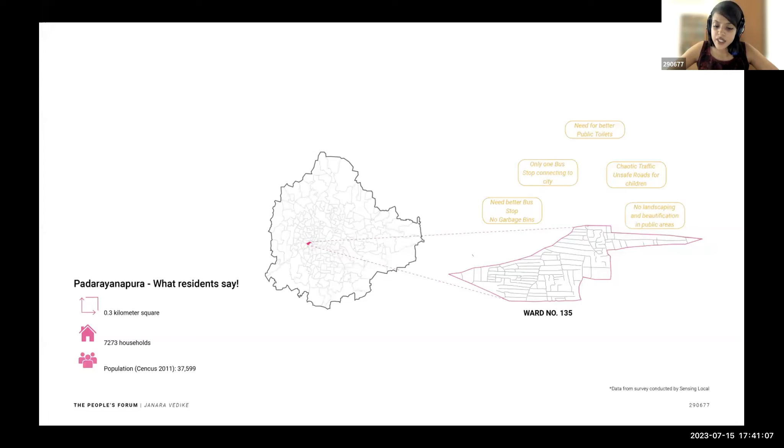Janara Vedike, or the People's Forum, is an attempt to build a ward-level identity through urban transformation. Padarayanapura is a ward of nearly 38,000 people, and over the years it has remained largely underserviced with respect to built environment and public infrastructure. For example, there's only one major bus shelter in the entire ward.

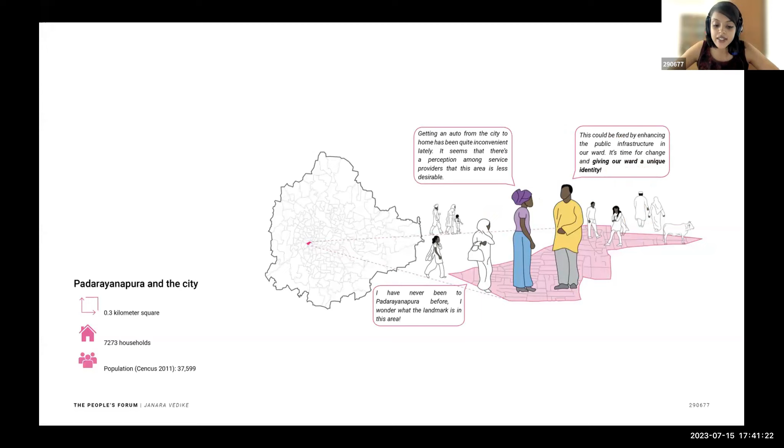Apart from these infrastructural shortcomings, the people in the ward have also seen negative connotations associated with their ward, which has significantly affected their relationships with the city. So when conditions of the built environment are impacting social relationships within the city, how can design be used to create a sense of identity?

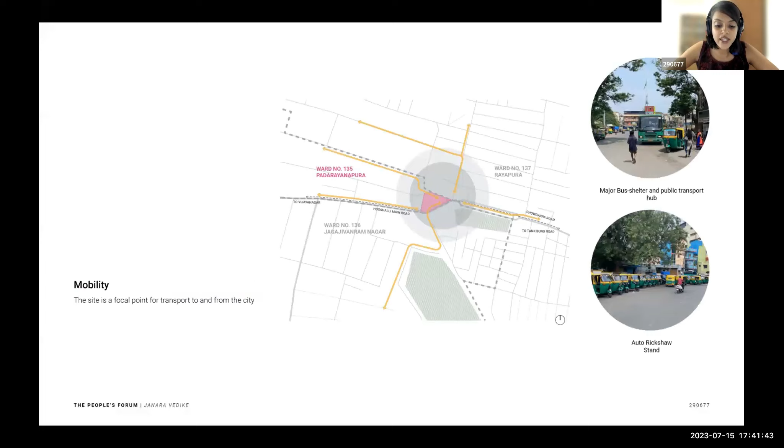To build the identity of the neighborhood, we have looked at existing systems on site. As it was pointed out, the bus stop, being one of the few in the area, anchors the site and becomes a focal point for transport to and from the city.

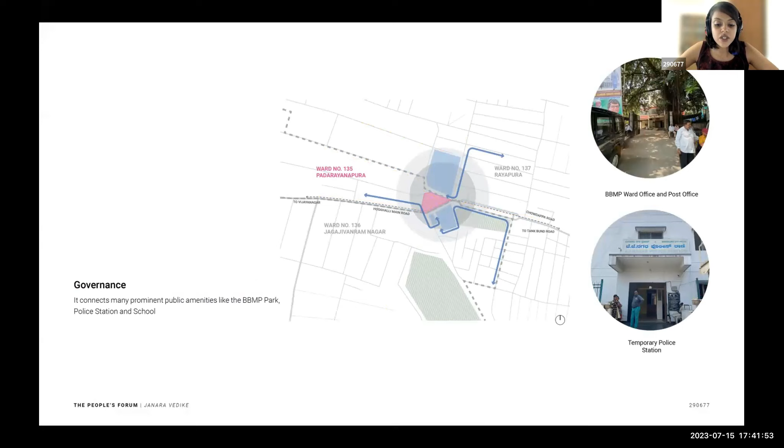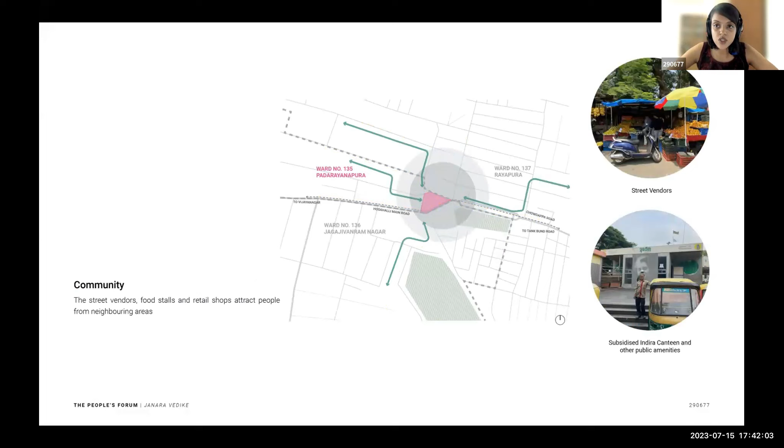Public services like the police station, post office, are located at the junction, making it a nodal point for ward-level administrative activities as well. The junction attracts not only its residents, but also people from neighboring wards for recreation, shopping, and street food. Can we now leverage these existing systems to achieve a transformation?

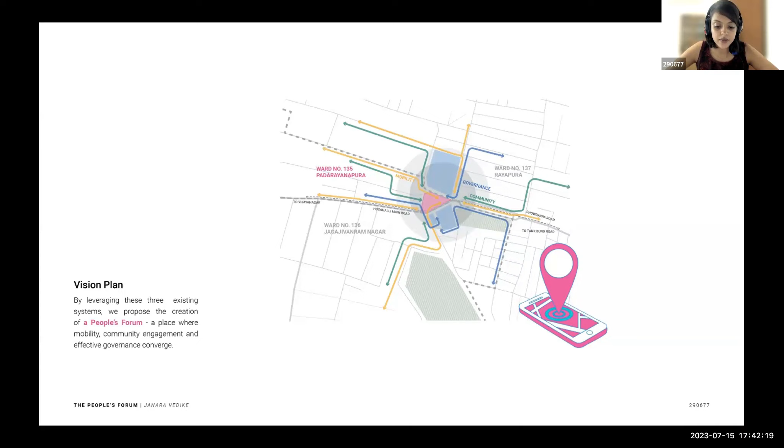We propose the creation of a People's Forum, one that is a transit hub, a governance center, and a community space at the junction. Having identified these three networks, we have also looked at their individual challenges which need to be strengthened.

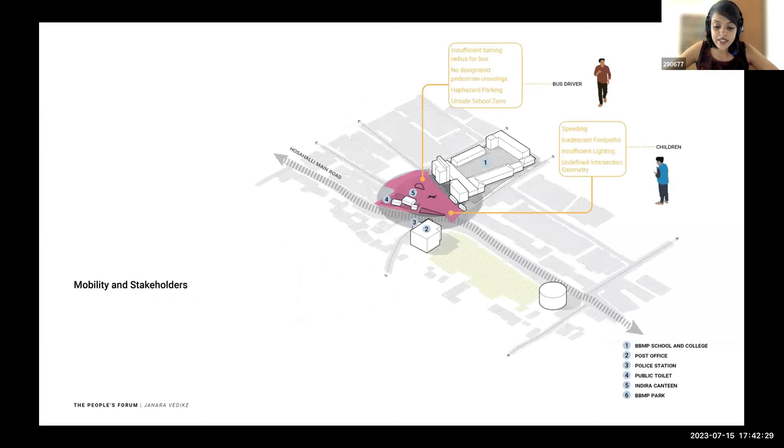A key concern hampering efficient mobility is an insufficient turning radius for buses and undefined intersection geometries. Apart from the primary mobility challenges, we have also identified those related to spaces for governance, like the disconnect between public buildings and inadequate waste collection systems.

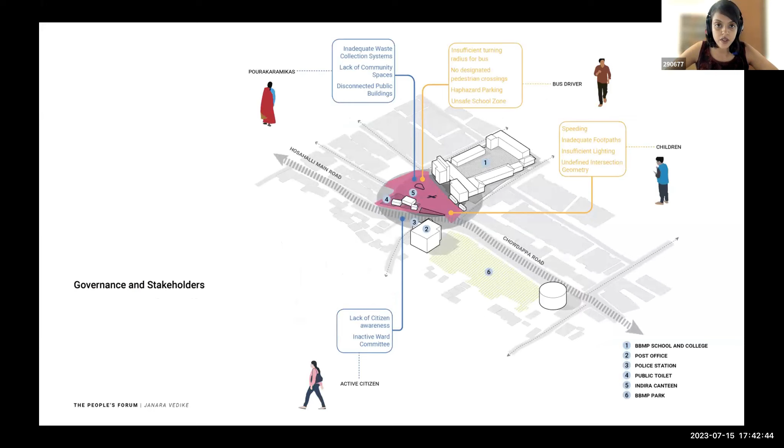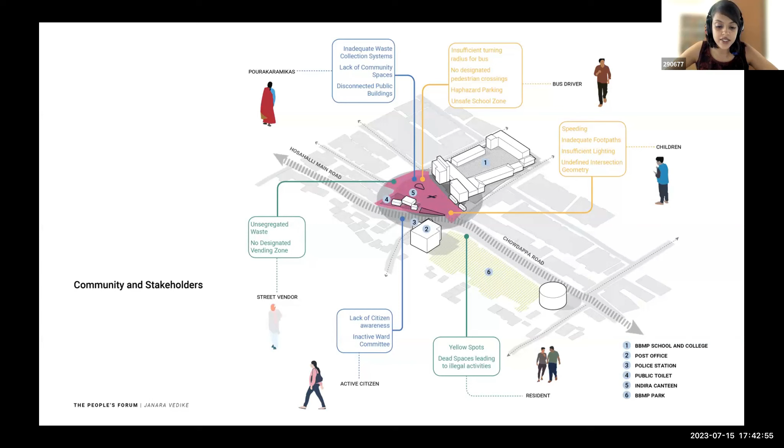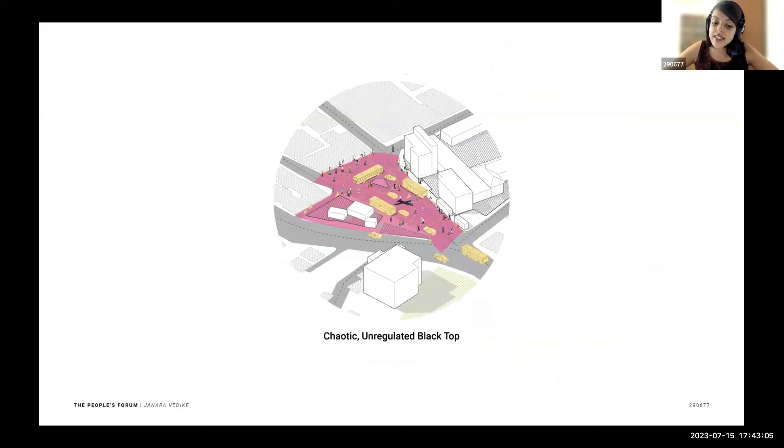For community-related activities, we found that there was no designated vending zones, a large number of yellow spots, and dead spaces which were leading to illegal activities. Together, these have created a large undefined blacktop, which is unprogrammed, thereby leading to haphazard vehicular movement, encroachment, unsanitary spaces, and an overall uninclusive environment.

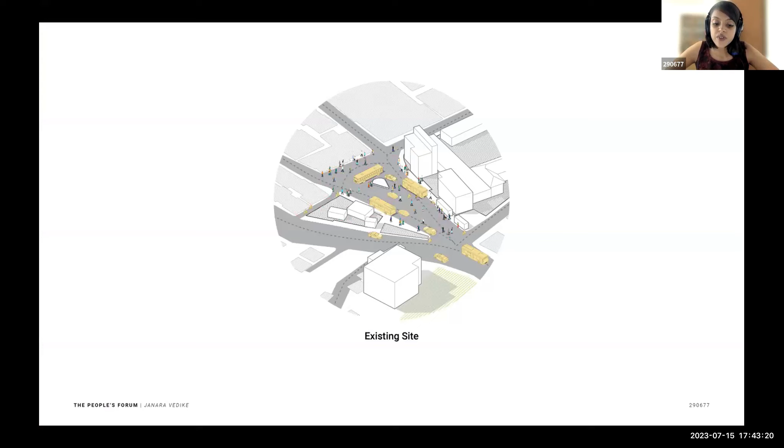Who does this space really belong to? And can we reclaim space back for the people? To build a public-centered junction, we have first adjusted the road widths, widened the connecting street, and created a larger turning radius for buses. Through this, we were able to reclaim spaces for a range of public activities.

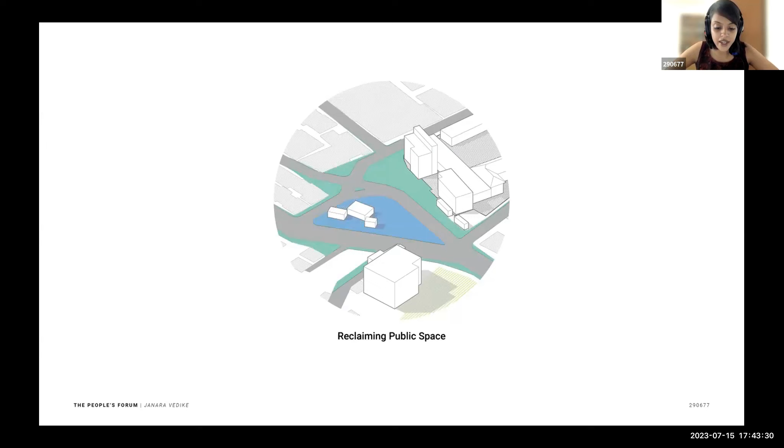By ensuring appropriate traffic calming measures and clearly defining spaces for pedestrians and vehicles, our conflict area has now been transformed into a people-centric junction. This site will now become a nodal hub for neighboring wards.

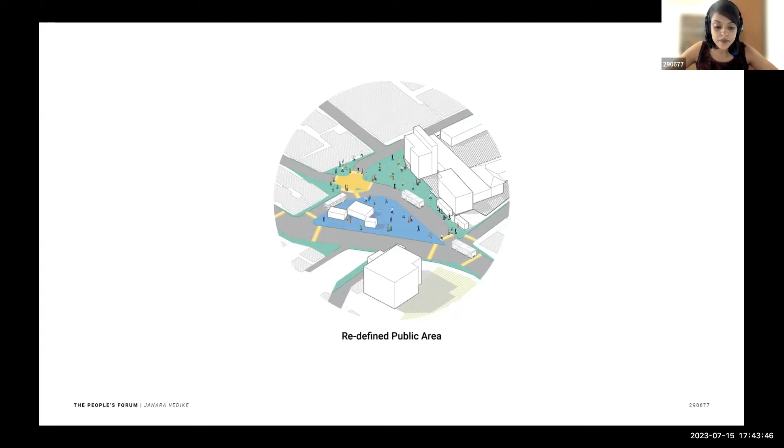To achieve this, we have designed a scalable framework that attempts to connect, collaborate, and celebrate. Each of these systems is driven by core values that define its vision: connections to the city through a safe, accessible, and efficient network, collaborations through a participatory and equitable approach while increasing accountability, and celebration of a healthy, inclusive, and sustainable community. We begin with the mobility toolkit.

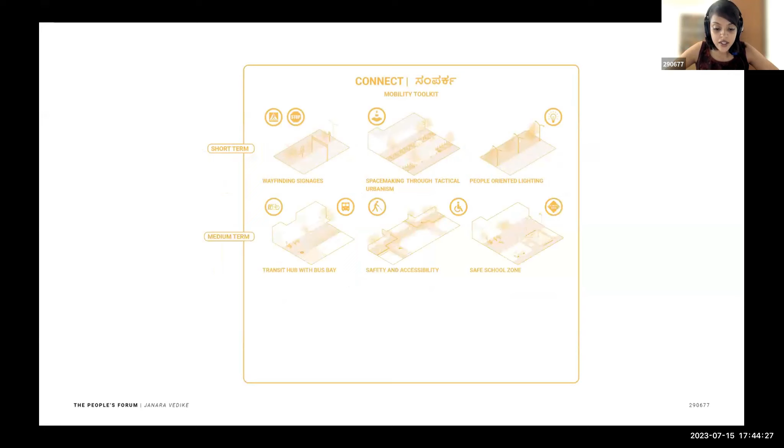The immediate interventions that affect mobility include on-ground elemental changes that can impact road safety and efficiency, like wayfinding signages and reclaiming space through tactical urbanism trials. Eventually, a change in value systems is required to create universal accessibility.

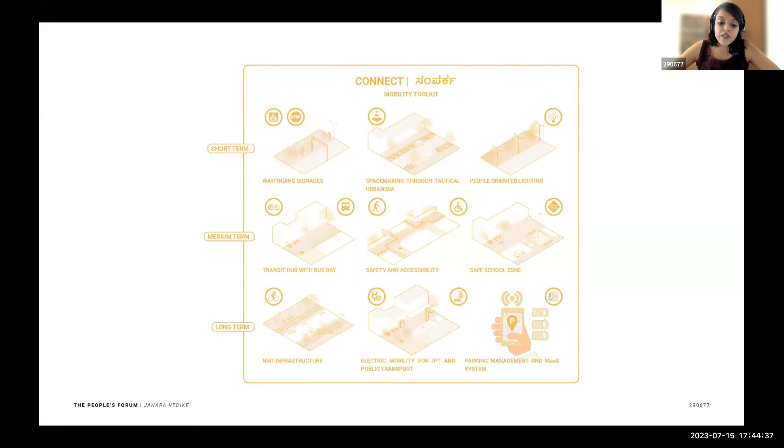In the long term, we envision an integrated, sustainable system with technological advancements like NMT infrastructure, EV public transport, and tech-based parking management systems.

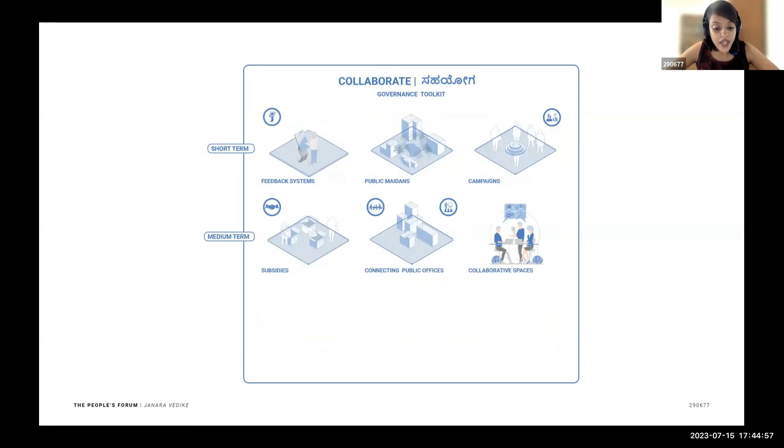Moving on to the governance toolkit. The short-term goal is to build accountability in the governance system by creating feedback mechanisms and a space for the people to come together. Gradually, to enhance equity in the spaces, we are trying to look at spaces for collaboration and ones that can connect important government offices.

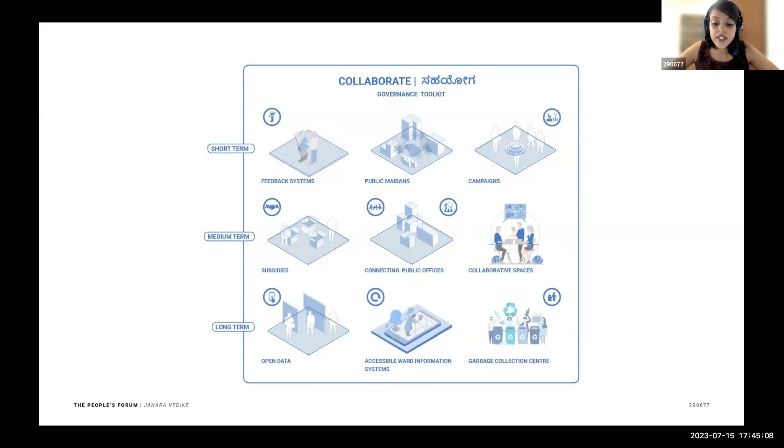In the long term, this toolkit aims to leverage technology and city-level schemes to bring an identity to the ward and put it on the map of the city.

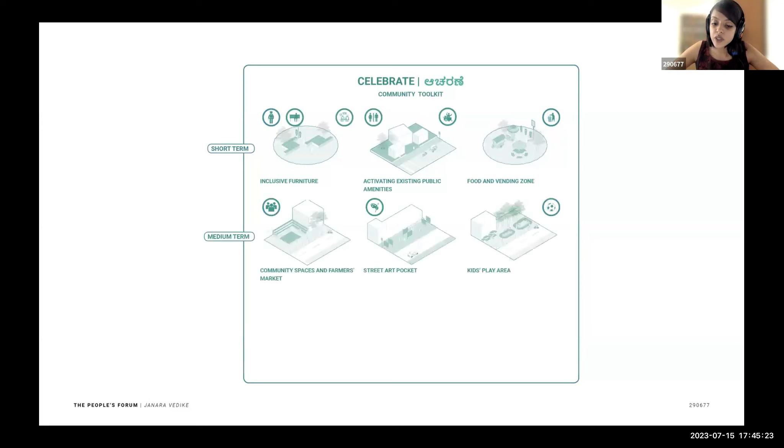And lastly, the community toolkit. To create a healthy community, we can begin by strengthening the existing community activities like food vending and recreation. We can then look at creating newer community spaces that are inclusive and diverse. And the eventual goal is to build a sustainable, future-fit neighborhood.

With this toolkit in hand, we now begin to spatialize this vision. The mobility plan reworks the bus network. It now includes a designated bus bay to reduce queuing time.

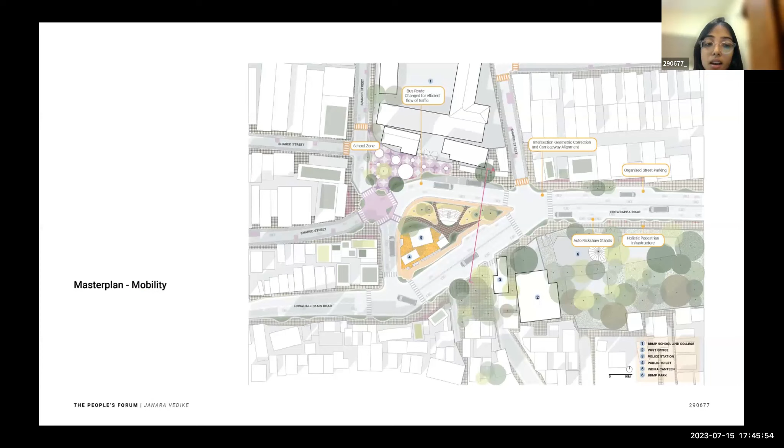A combination of compact raised and at-grade intersections ensures safe pedestrian circulation and connection with shared streets. A section through this transit hub highlights last mile connectivity through IPT and cycles and designated on-street parkings.

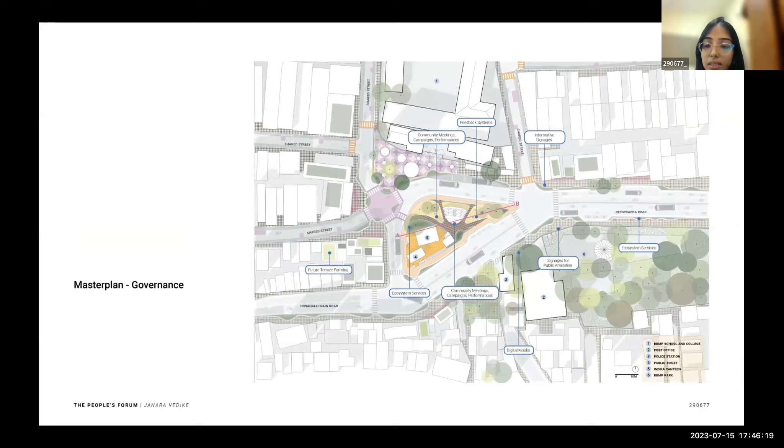Next, we look at the governance plan. The governance plan creates a forum that sits at the intersection of public amenities. In this forum, spaces like the amphitheater allow people to get together and take action for their ward through campaigns, ward meetings, and citizen awareness events. A section through this central forum highlights collaborative spaces for the community, along with ecosystem services to ensure circularity.

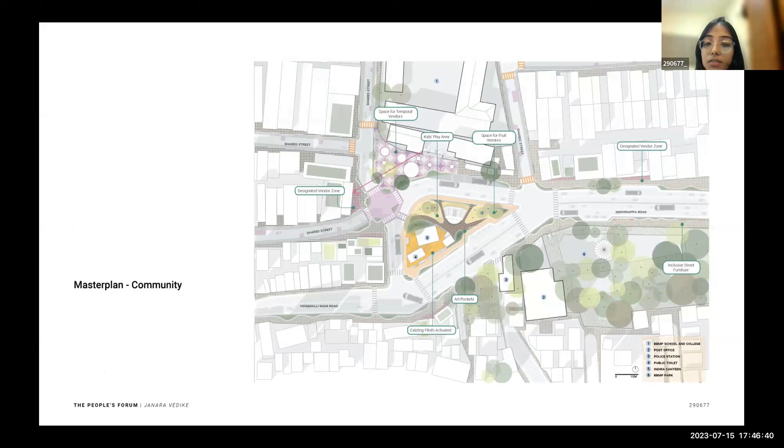Next, we look at the community plan. The community plan makes spaces for food and street vending, a central park which can be used by women and the elderly, and an interactive school edge for children. A section through this school zone highlights tactical urbanism to engage children and to establish adjacencies of various programs during the day. The street edge is also lined with bioswales to aid in stormwater filtration.

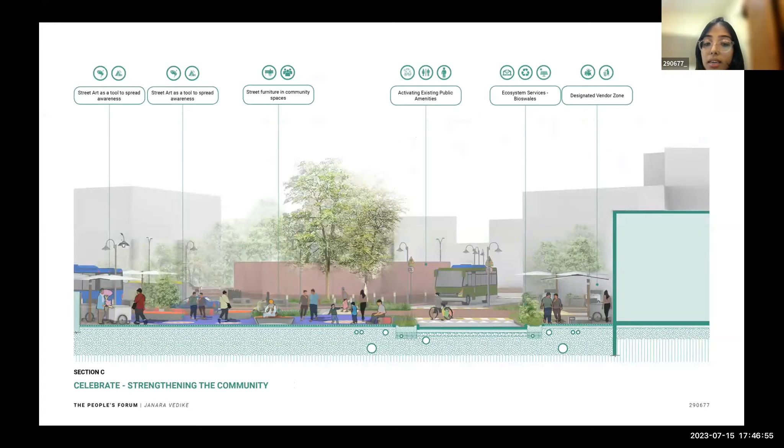Now, looking at the implementation of the vision, as designers, we recognize the importance of collaboration in envisioning the future of our cities. By categorizing goals based on timeframes and involving diverse organizations, we can turn this vision into a reality. First, we look at our aspect of connect, where mobility systems can be enhanced if government transport bodies can come together with the support of NGOs and think tanks for their expertise and private organizations for their products.

To talk about the aspect of celebrate, organizations such as Sunday Saathi and artist group can help formalize existing community activities. Further, street toilets, subsidized canteens, etc. can be maintained with the support of resident welfare associations.

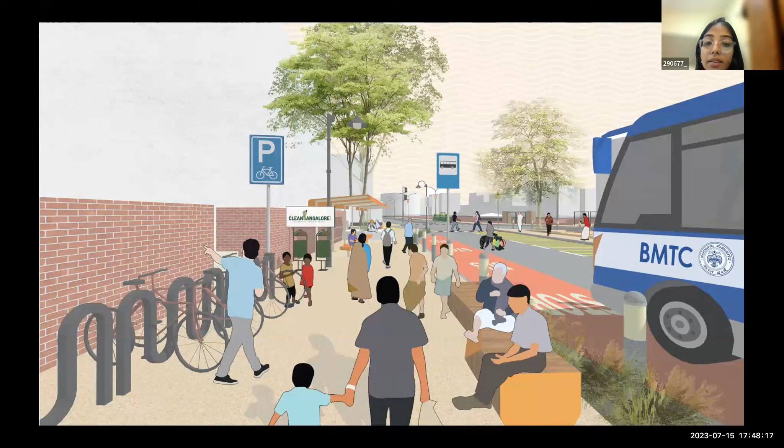Next, an unsafe street with conflicting pedestrians and vehicles will now become a pedestrian-friendly zone for all that can transform throughout the day from being a safe school zone in the day and a food vending market in the evenings.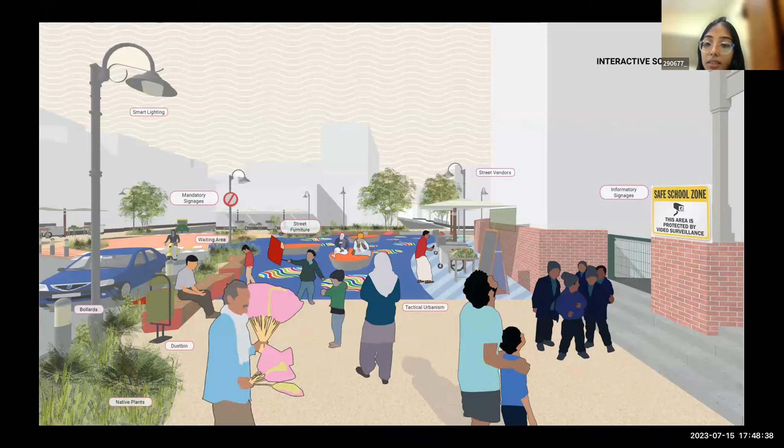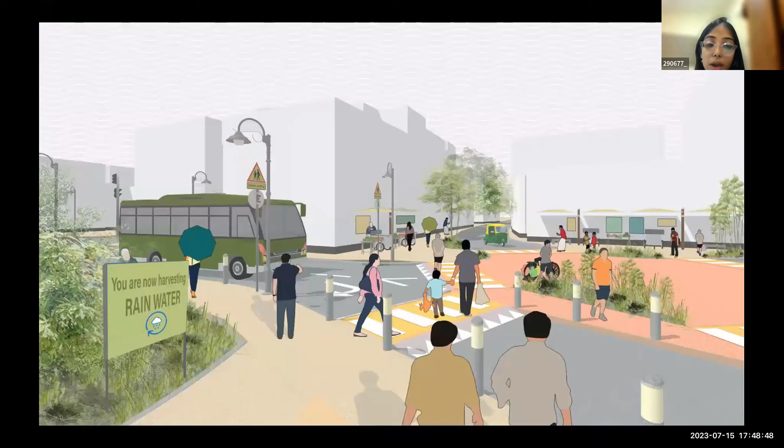Next would be an undefined intersection where neighborhood streets meet and the community activities like street vending takes place, which will now become a raised intersection with designated vending spaces, while also transitioning to a sustainable future.

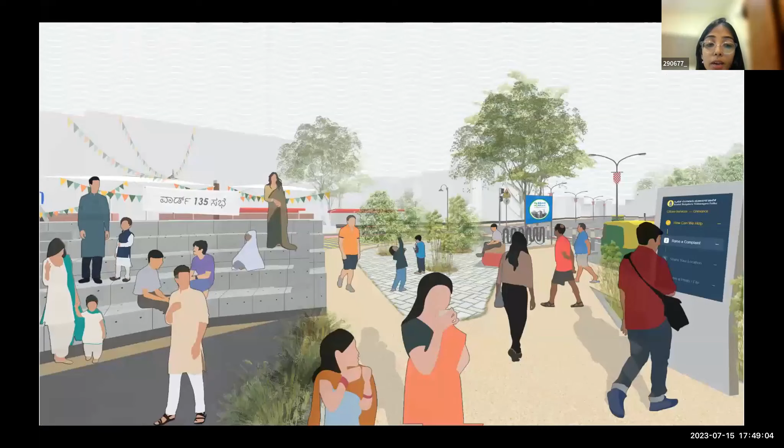The last would be the central triangular island with existing public amenities, which currently is a dead space, will now become a space for the people of Padarayanapura to voice an opinion, be heard, and take action.

Join us to connect, collaborate, and celebrate, and build the vision of a People's Forum. Thank you. Thank you, team.

Sobhya, maybe you can start with your questions. Hi, sure. I mean, I'm happy to get the others to come in. I can make my notes later. No problem. Sure. Ketan, could you begin? Yes, sure.

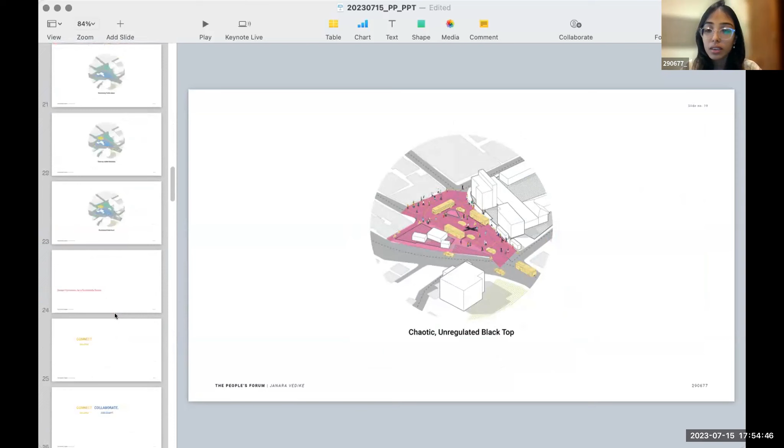I think you pointed out very well that the bus route did have to change. We looked at the existing movement - the bus currently goes front and back to take that U-turn. Since this is also the first and last bus stop, the bus waits there for 10-15 minutes before leaving. So we had to cater to the fact that maybe two buses would be waiting at one point, and we needed space for queuing up. So we planned to reroute it by creating a signalized intersection here. If I can get a pointer, just a minute.

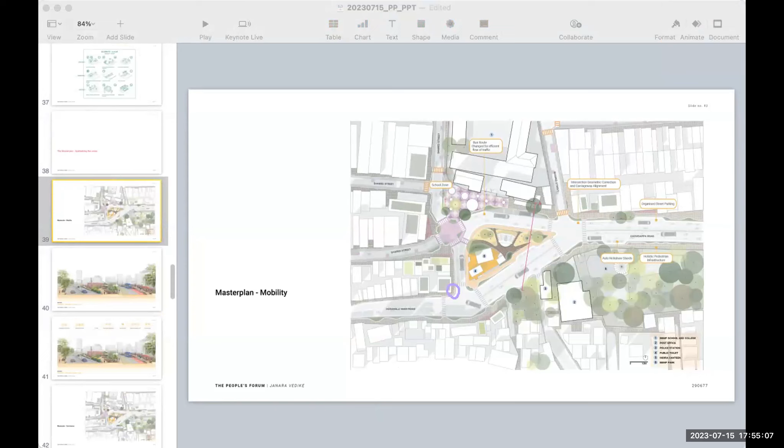Anyway, bus routing is the right strategy. I'm saying road widening - your whole master plan hinges on widening of roads. I don't know how practical that is per the site. That's my point. I'm not saying it's bad, I'm saying that's where the challenge lies. No, I fully agree with you.

While we tried not to touch the existing structures, we've broken the plinth in our design, but the existing structures - the public toilet and canteen - we've tried to retain. So we're assuming only the plinth would be reduced, but of course there would be many more on-ground challenges with widening, and that's something we have considered.

I'm sure there are hawkers and all, no, where you've given the school zone. What happens there currently? I'll just take this.

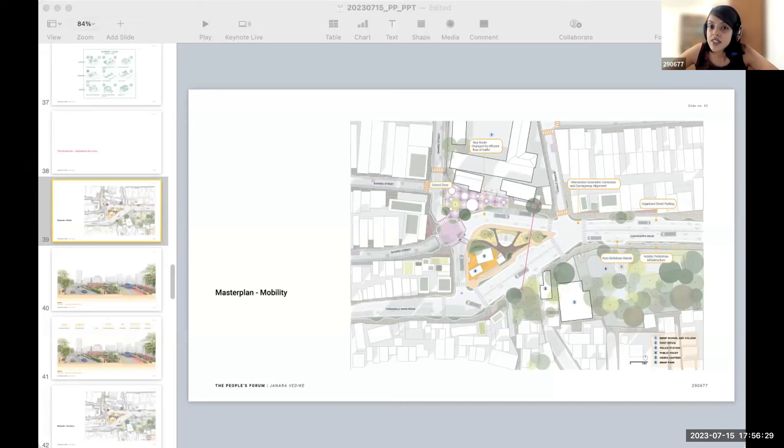In the school zone, there's currently a very narrow footpath on site, with temporal hawkers who come early in the morning and late at night. So our school zone area is designed to be an adaptable space - during the day it becomes a safe school zone, while it has designated spaces for vending in the evenings. That's how we imagined it. Regarding the connecting street that's been widened, we've actually retained the road widths for all other major roads, equalizing the right of ways and reclaiming more space, streamlining that entire process. The only street that required widening was the connection between this road and where the buses turn, only in the central space, where we found enough space to do it without affecting the structures. As my colleague pointed out, it's only the plinth of those structures that will have to be broken. Not denying there will be definite implementation challenges, but we feel that's the most efficient way to resolve the mobility issues here.

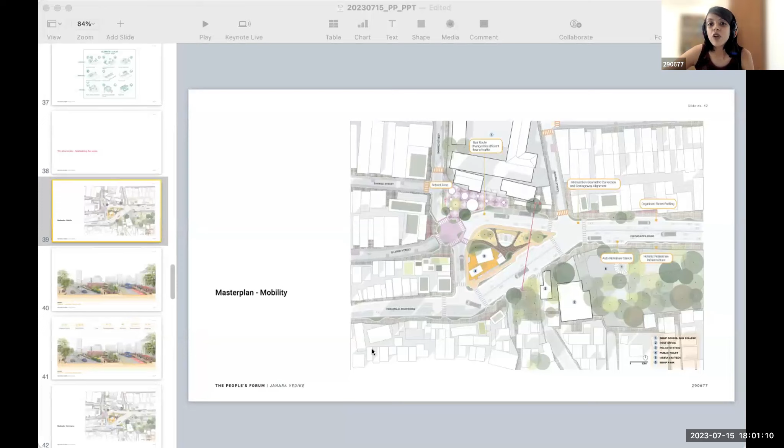No, actually, we did realize that there is a lot to be achieved in the kind of master plan we have proposed, which is why we're looking at a time frame in the implementation strategy. We have done things that can be done short term, and then you can do trials through tactical urbanism. You can ask the community to get involved, get their feedback, audit the system, which is why we're also saying get organizations like WRI to participate in this process, audit these systems and see how much is possible. We understand there may be a lot of things that cannot be achieved, but if there is a vision to do this, then maybe we can get to like 70% of this.